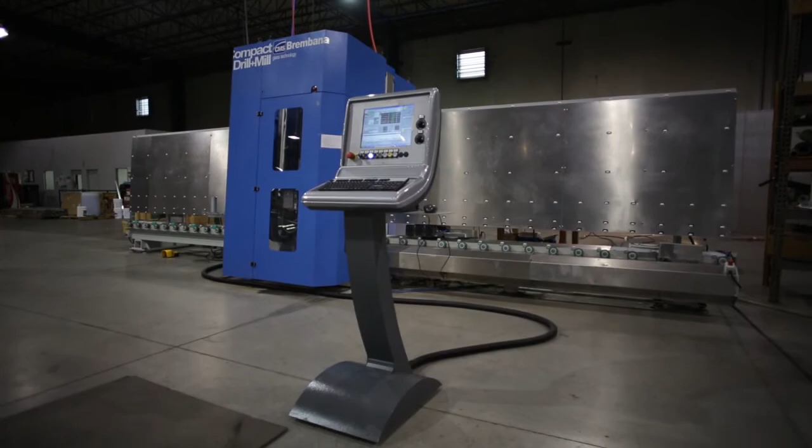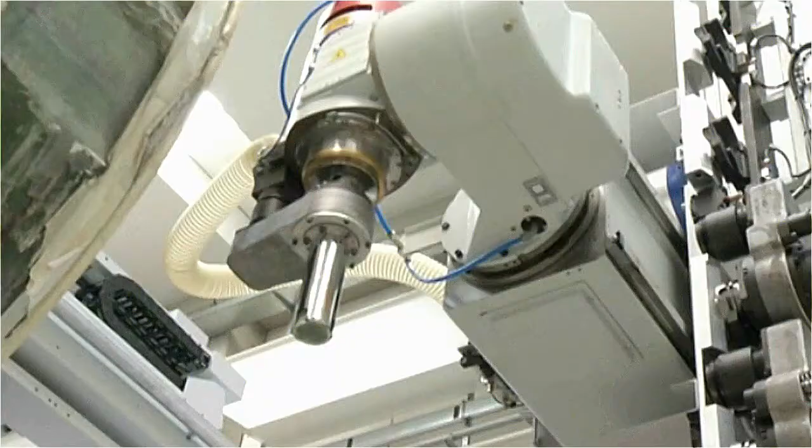The name CMS North America is actually an important name because it indicates why CMS North America exists. CMS stands for the construction of machines that are special. CMS was always looking for a niche, problem solving, where people would come to CMS when they couldn't find another OEM machine tool builder that could solve their problem. It wasn't about selling product, it was about understanding what problems the American industry was facing that needed solutions, and CMS was ready to do that.

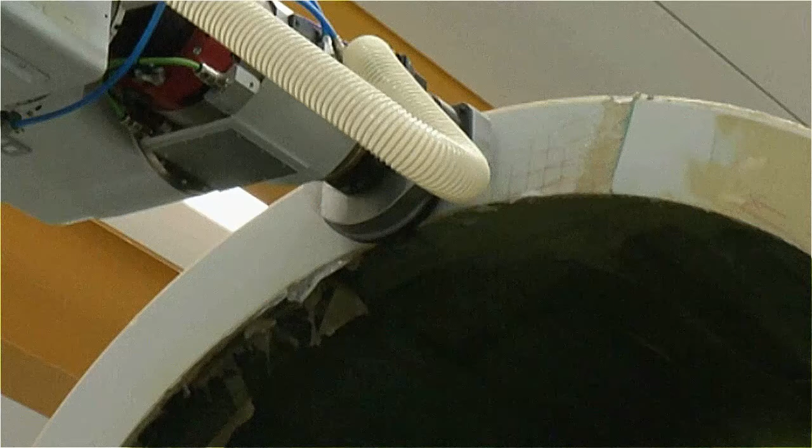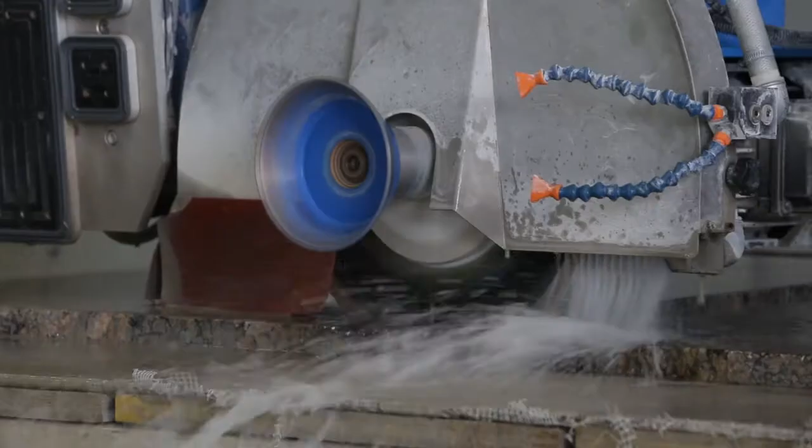Basically, CMS North America is a sales and service distributor of CNC machinery. We build CNC machines for anything from advanced material to wood, glass, plastic, stone. What we do is try to understand what people need as time is changing and provide those solutions. Machines that are special is exactly what the market's been asking for more and more as time has gone by.

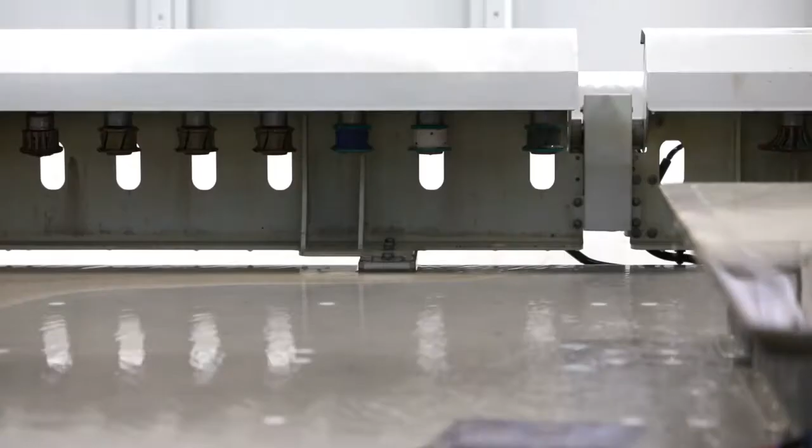The phones are ringing more. The customers are calling, looking for machines, needing to repair their machines, and we respond to their needs, whether they need a technician or phone support. CMS tends to go over and above typically to get the customer back in working state.

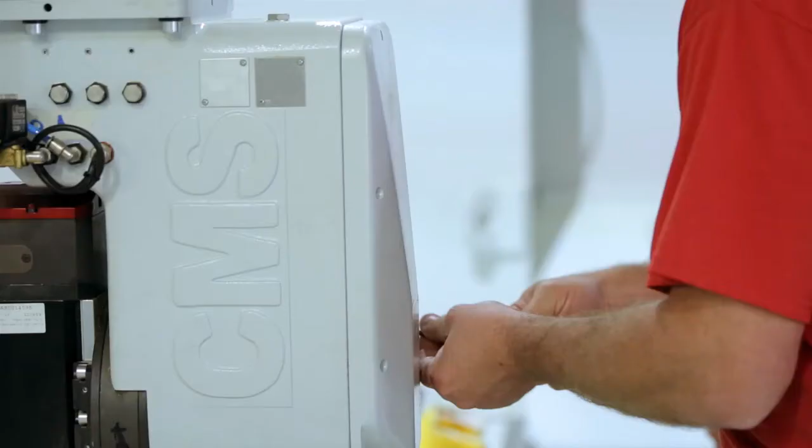The things that really matter to our customers quickly change after we've provided a machine to them, because what they really need is somebody who can help them use the machine to its fullest potential, support them every day as they're trying to use it, help them improve their ability to use it, and then keep that machine up and going.

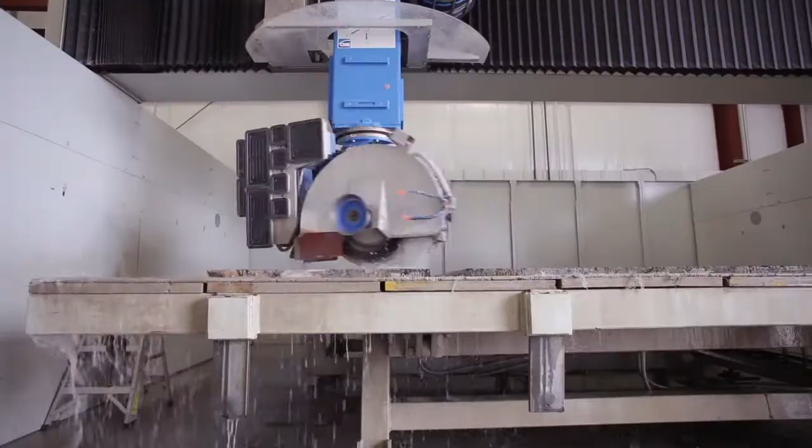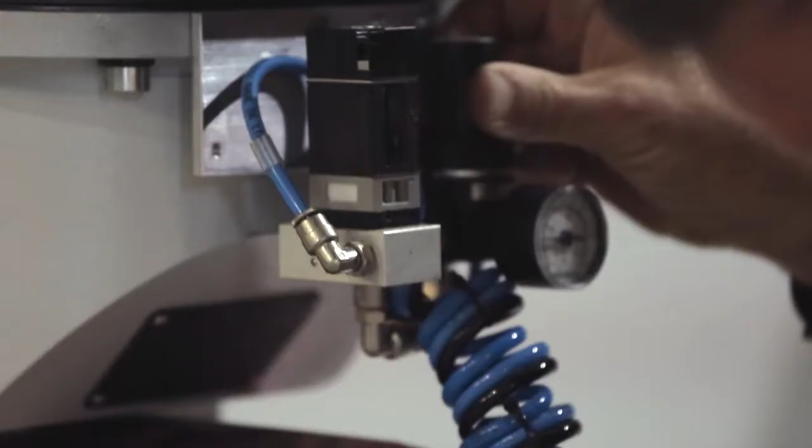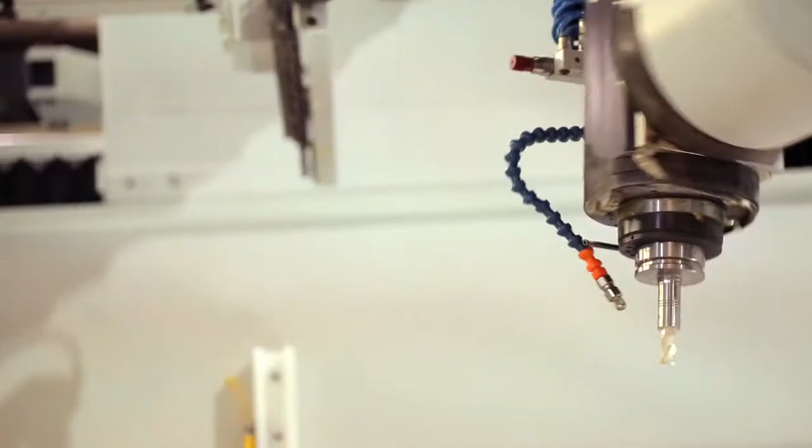What intrigues me about CMS, at least in this industry, is that we are the OEM. Our technicians are factory trained, unlike some of the dealers who are around. Their technicians have to work on multitudes of equipment, panel saws, edge banders, where our technician specializes only in routers.

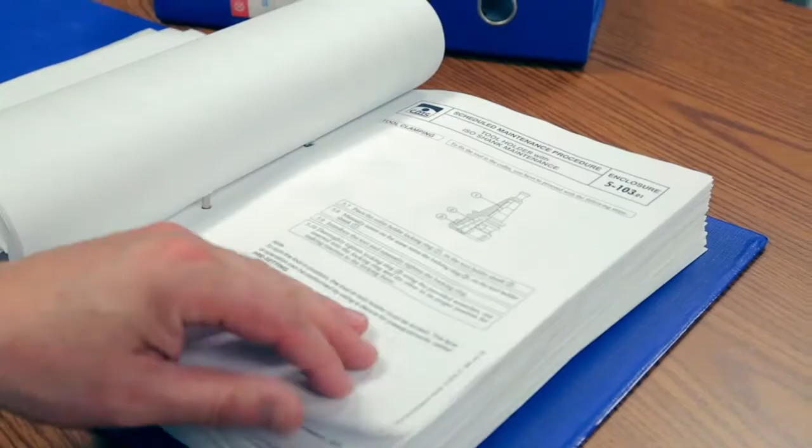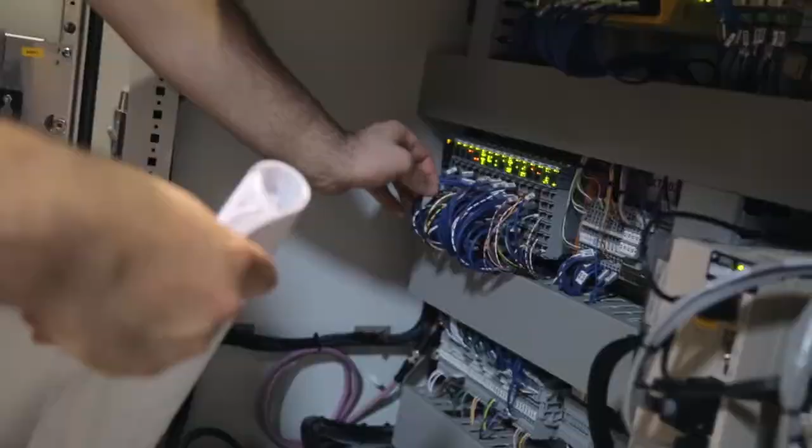If a customer buys a machine from a dealer, they may have a very limited trained staff that might kind of know how the machines generally work, but here we have electricians and mechanics, programmers and machine drawings, the PLC, the backups of the software and the different items inside of the control. So if there are problems or things that need to be troubleshot or looked at, we can look at a lot of things here. And that really separates us from a lot of dealers or other machinery importers.

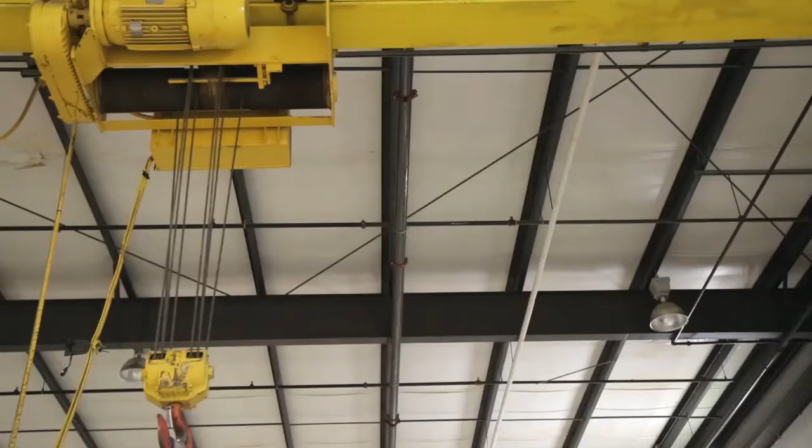These machines should be running 20 to 30 years long. We've got a lot of the older generation machines that are still running every day, with new technology being put into them. We've done a lot of testing here with motors and drives to retrofit some of the older machines and bring them up to today's technology. So once the customer makes that investment in machinery, we try very hard to keep that machinery moving along for them.

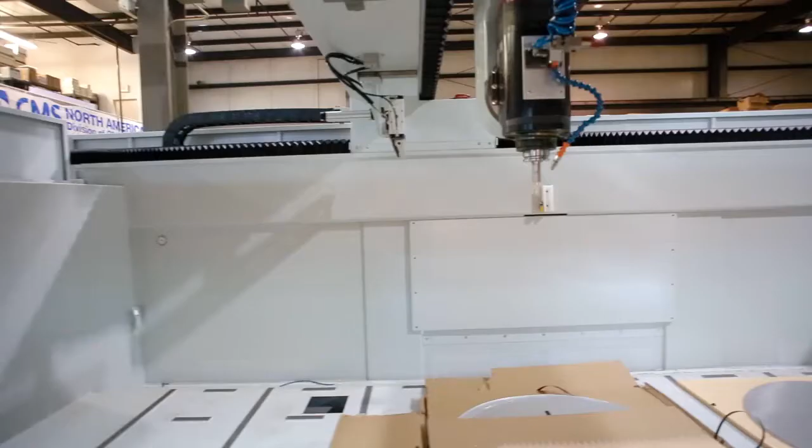Everything is done now electronically through databases, so we are able to stay in contact very easily through our database systems that we've developed. When the customer calls in for repair, or calls in with questions on his machine, a phone report is started, and it will say who the customer is, what machine is going on, and a little blurb about what their problem is.

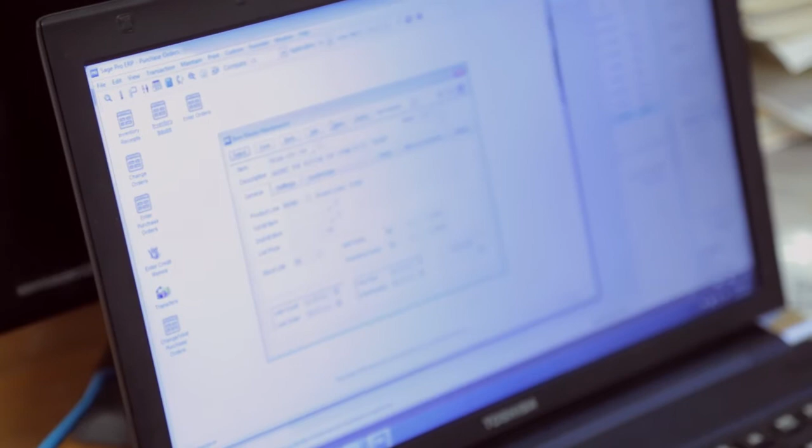We've developed a very good parts and service database, which is actually tied to the project management also, that keeps everyone linked together. Between myself and 3 or 4 other phone service people, they can pick up the report and see the 5 things that we've stair-stepped down through to help the customer. We've got it time tagged, so we know exactly what was talked about, and we're able to communicate to their company if it's set up and they'd like to know.

And everything is documented, and the nice thing about that is the history. If you call back up and say, I ran into this problem 5 months ago, we can go back and recheck the logs to find out.

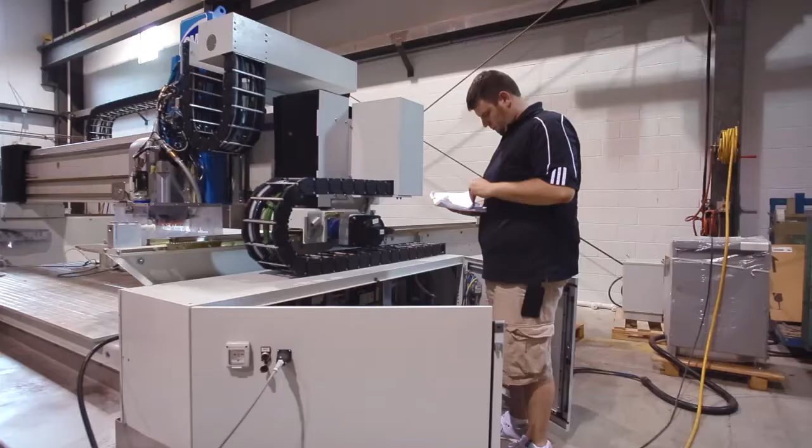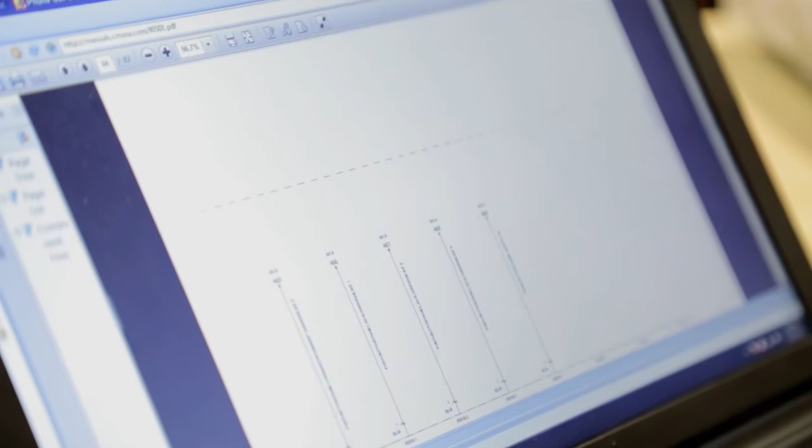Our database has gotten so powerful now that even our technicians who are out remotely have access to be able to do phone support remotely through the system. They can see the dashboard, and if they want to pull up customers' electrical schematics or mechanical prints, they can click a button and get all the information in front of them. It's a nice service tool for the customer as well as for us.

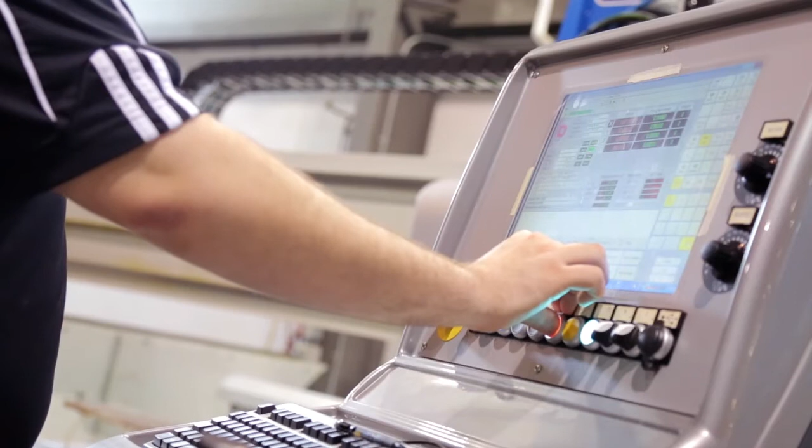From a service standpoint, we've been doing this for a number of years, probably since the early 90s. We are a very big promoter of preventative maintenance. We want to prevent things from happening rather than being reactive. So we developed a service package, the top performance package, which is really a group of strategically important services that our customers need from us.

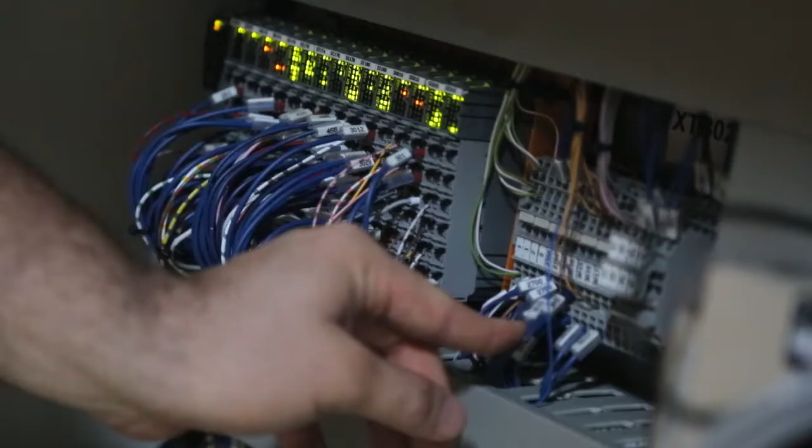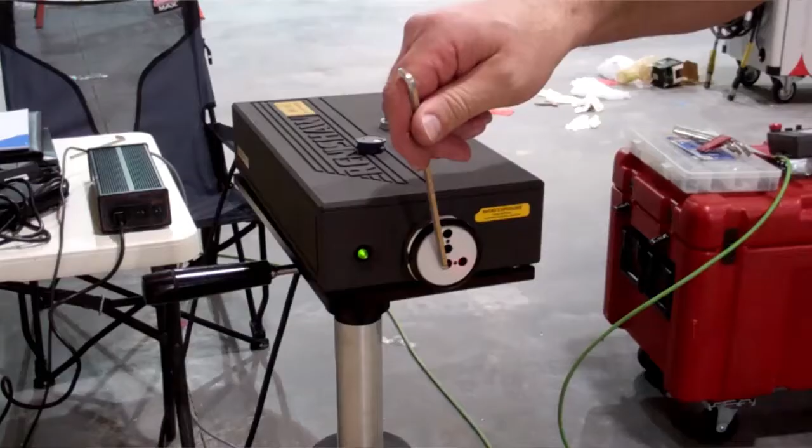Within this package you can get a multitude and variety of things, anything from preventative maintenance done on the machine, which can be done every quarter, every six months, or once a year. Other customers say what they need is continuing education for the people using our machines. We also offer a complete array of calibration. We've made a huge investment in laser equipment that can check the geometry, straighten it out, and even map the machine linearly with lasers to improve its accuracy.

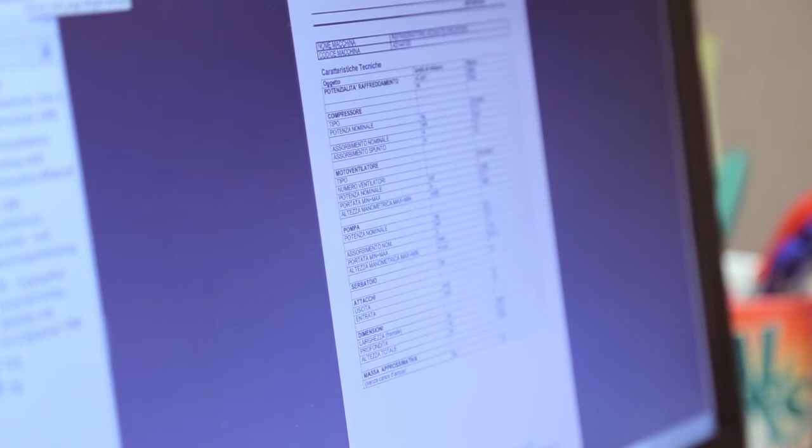It's almost like a menu. With these top performance packages, you can buy very little or you can buy a lot. You need to have the tools necessary to guarantee that you can keep producing at the same level every day. These machines are built very well. If they're checked and the maintenance is done, they can last and they'll run. You're not going to have unexpected breakdowns, so you want to make sure you're doing the preventative maintenance.

I see what kind of relationships we've built with our customers, keeping them running and satisfied with the equipment that we sell, and knowing that we do provide very good equipment and solutions for the needs that they have.

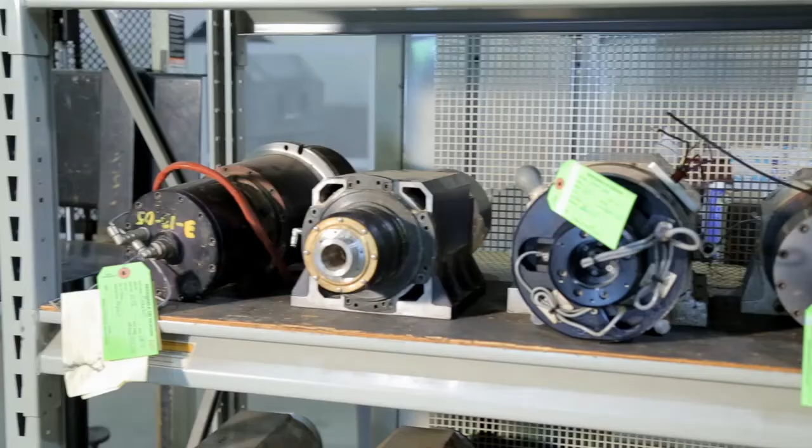When we consider parts support, we're looking at not just supporting machines, but machines that have been out there for a long time across the board. We have thousands and thousands of parts. We want to make sure we have in inventory what you need. These machines are built to run for 20 to 30 years.

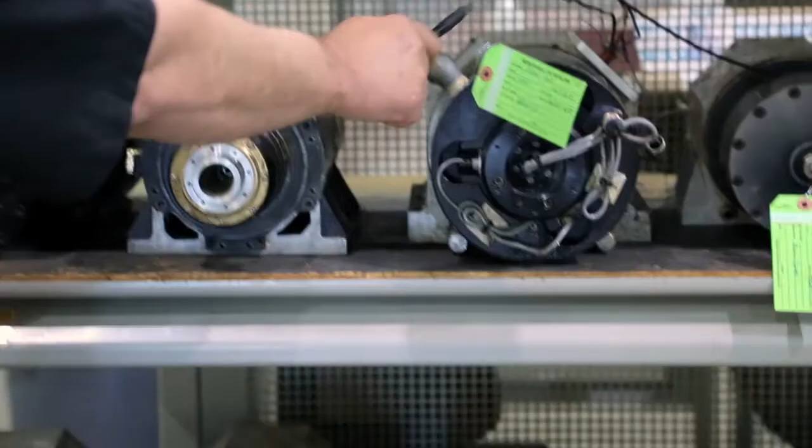Large mechanical components don't fail overnight, so we monitor the turns of things and make sure we have the adequate number of those parts to fulfill the turns that happen each year. I'm very proud to say it's a very rare occasion that someone needs a part that we don't have in stock. CMS put a large investment into putting in an in-house spindle repair facility.

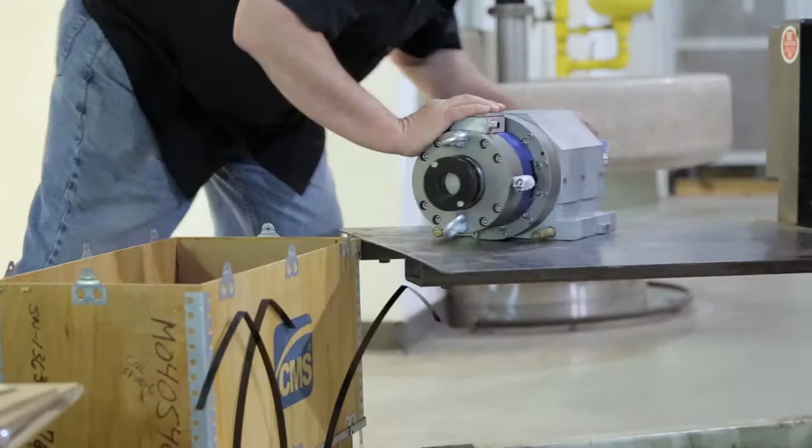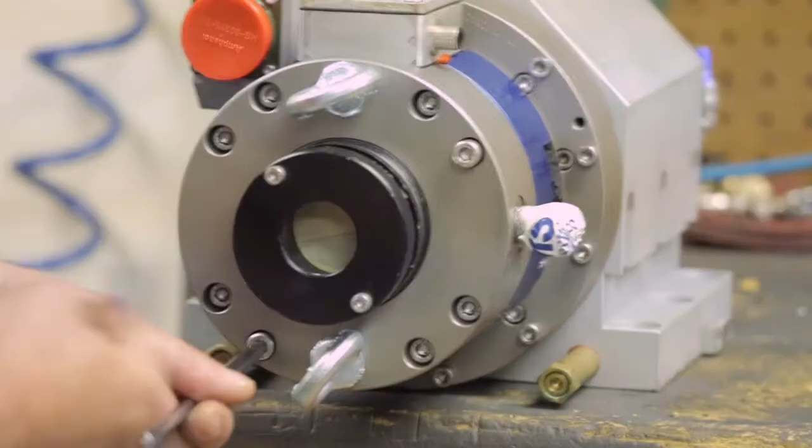The spindle is the brunt of the work. It takes the force of the tool, it takes the force of the material. CMS tends to go over and above typically to get the customer back in working state. I understand what customers are looking for when they rely on us for information and to keep their equipment up and running, and what it means to them to have their product producing for their business.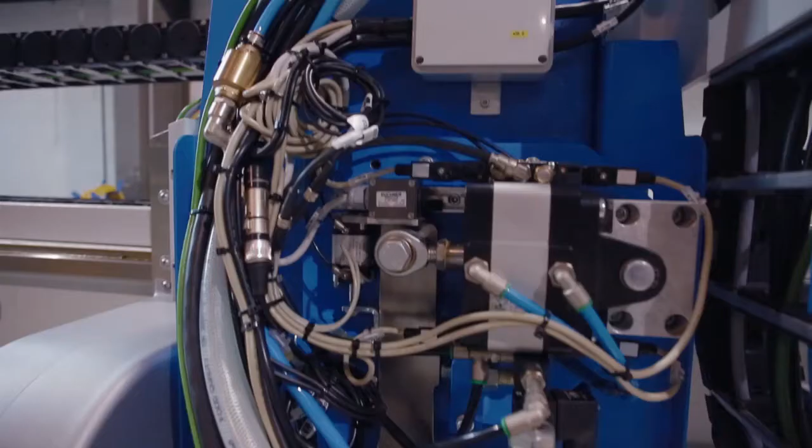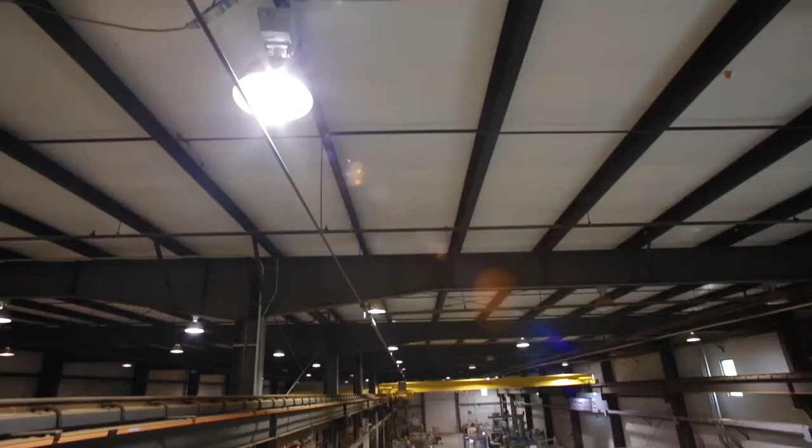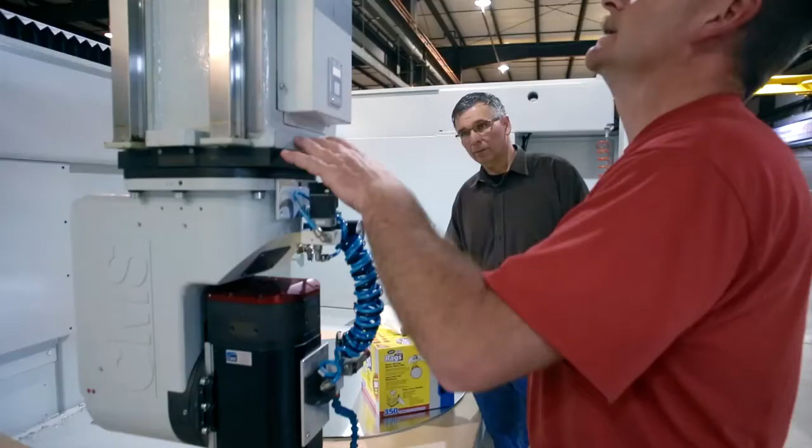CMS North America is the result of more than 30 years of working in the United States. We have a tenure of our employees around 13, 14 years. We have a lot of veterans. When you have that much longevity, even if you have an older machine, these guys have still been around—they may have been the ones to put your machine in. From a service standpoint, you're going to get a guy that's an expert on a CNC router. Having that ability here at CMS is a big deal.

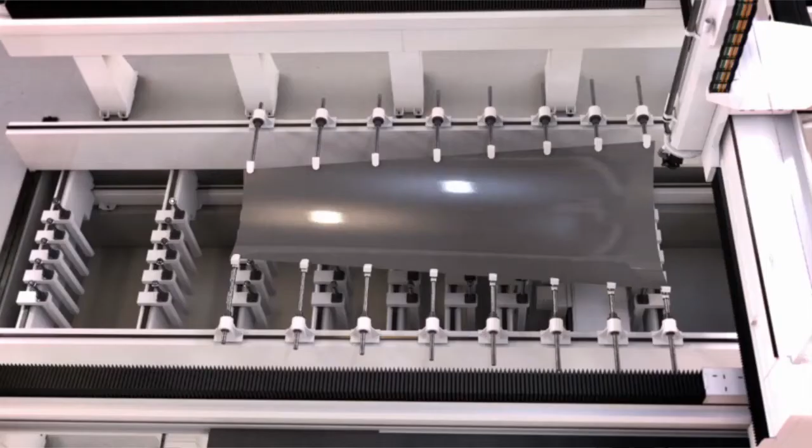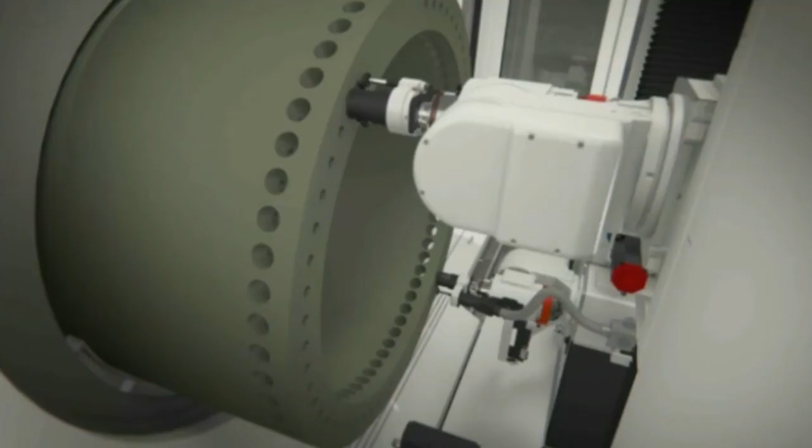We are here and we do this business every day because it's important to us. What's important is helping the people we work with do it better. That's the joy, that's what we get out of this, that's the payoff for us. That's why we want to do it more than anything else we could do, because doing this business is about making American business different than it's been in the past. It's about reindustrializing the United States for the future. And that's why people come to CMS North America.